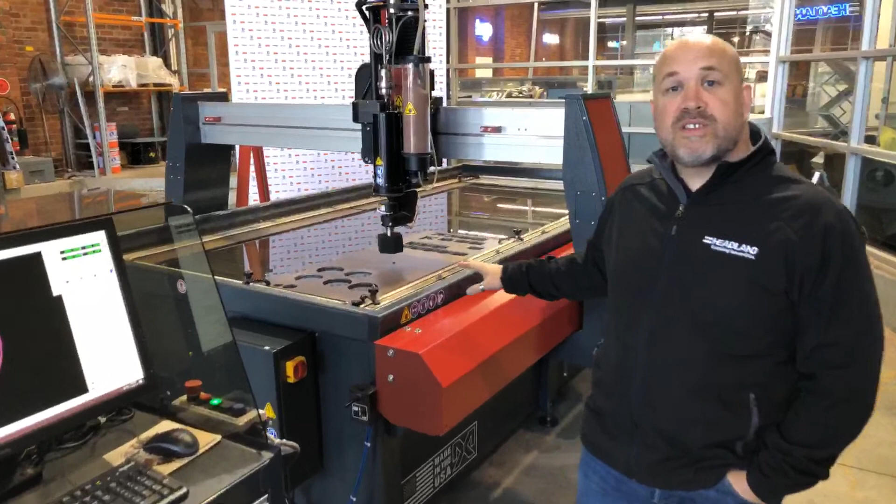Let's have a look at the machine. As I said before, this is the MAXIEM 1530 abrasive waterjet. 1530 means it's 1.5 meters in the y-axis and 3 meters in the x-axis. This one you see here has got some options on it, some additional extras.

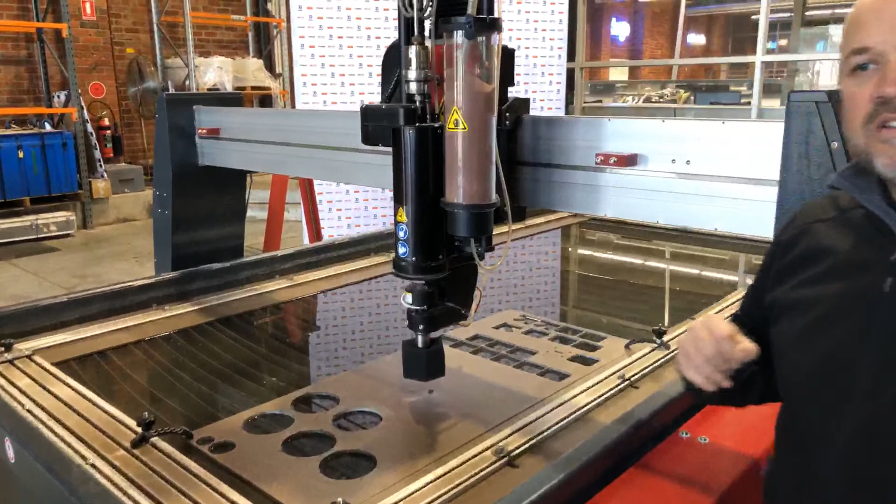We have the 5-axis cutting system. This allows you to do beveling, countersinks, well prep edges, that kind of thing. We also have at the back the rapid raise and lower tank. This is a fantastic feature for being able to raise the water in your bed quickly, submerge the cutting area, which means you get quieter and cleaner cutting. You'll see all this later when we actually do a cut.

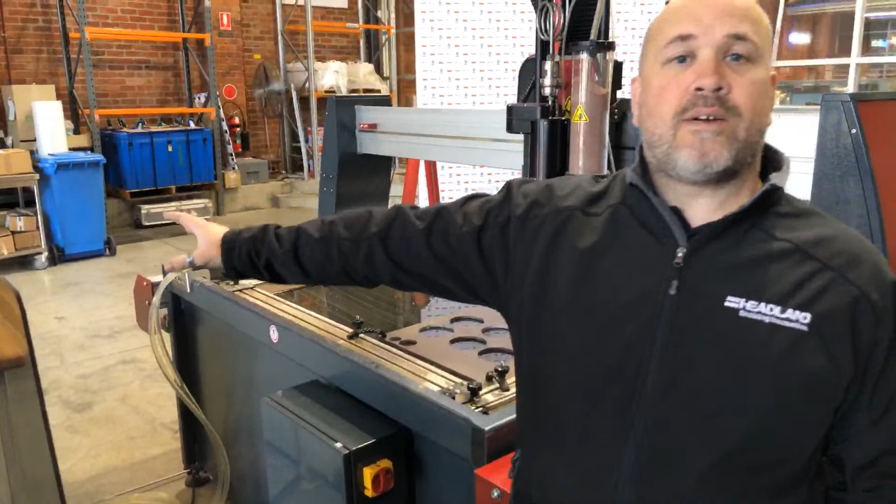In addition to that, we have the Enduramax pump on this one. This is Omax's premium pump. It has up to 800 hours of maintenance life between required seal changes and runs at 60,000 psi. Fantastic pump - it's the latest innovation in pump technology from Omax. We'll take you through that in a bit more detail in a minute.

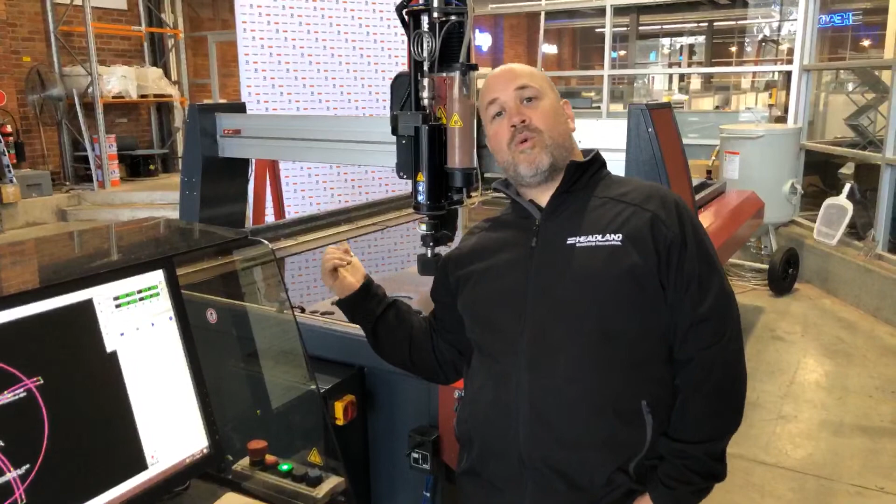Alright, so what we're going to do is we're going to take a quick walk around to the back of the machine where I've taken one of these covers off. You can actually see the drive system. So follow me.

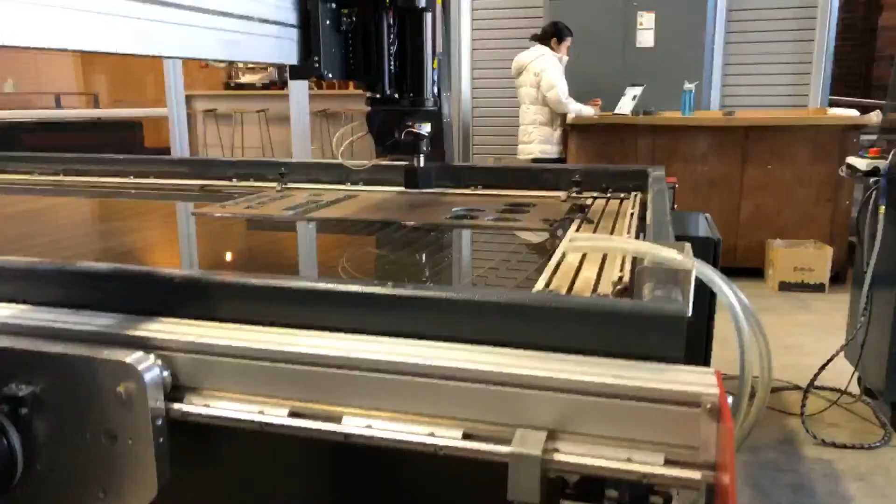Okay, so as you can see here, we have a drive rail on the x-axis. This here is a hard stop to stop the bridge from rolling off the end, obviously. We have a drive rail. Now, on this drive rail, there is a contact wheel on the underside, which is just tucked underneath there, we can't quite see it, and there's a pinch roller on the top. Now, what this allows the system to do is that when the drive isn't engaged, it just rolls up and down freely. It's very low forces, very free running, therefore doesn't require much power to run it.

Now, one of the great things about the IntelliMAX drive system is that it's the only drive system that's been specifically designed for abrasive jet cutting. What does that mean, you might ask? All the other drive systems out there - your rack and pinion, your belt drive, ball screws even to a degree - have wear components. If abrasive gets in there, it's going to cause you problems. This is an abrasive environment, so with all the best in the world, the abrasive's going to get in there. So it's going to wear these components down, it's going to cause problems in the future.

With the IntelliMAX drive system, you don't have any of that. It can run quite happily with abrasive on the track, it just simply pushes it out the way. The covers are in place to protect the drive rails from any reckless forklift drivers, shall we say, crashing into it, causing any issues. So it's there just to protect it from that kind of thing. It's not there to stop any water or abrasive getting on it. It will function perfectly well without it. It's purely there to protect it from collisions or anything like that.

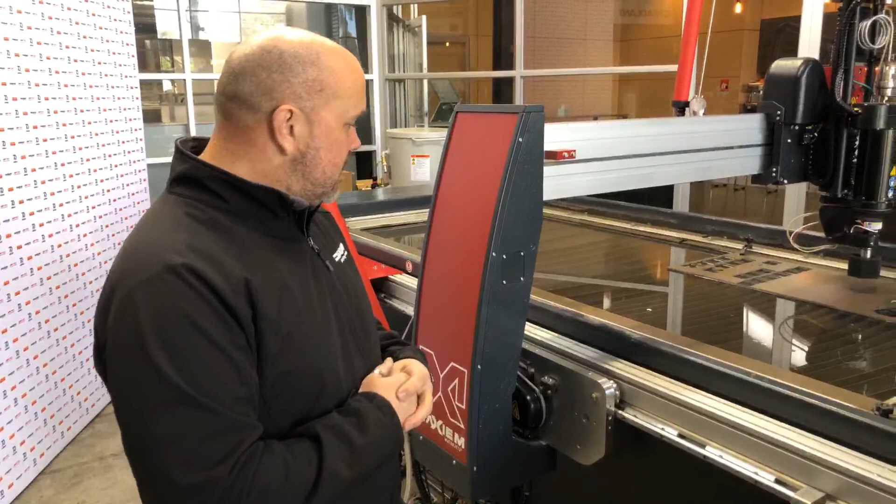Okay, so that's the IntelliMAX drive system. Incredibly efficient, incredibly accurate. It also has a 1 micron magnetic closed loop encoder system on it as well, so it knows where it is at any time. The fact that the front and the rear of the axis are both driven means that it is constantly monitoring, constantly adjusting itself to make sure that you get the accuracies you need from the parts you're trying to cut.

Alright, one of the other features I want to show you is this pump. As I said before, this is the Enduramax 40-60 pump - this one actually, not the 50, this is the 40. You can see, nice little wooden top, nice feature.

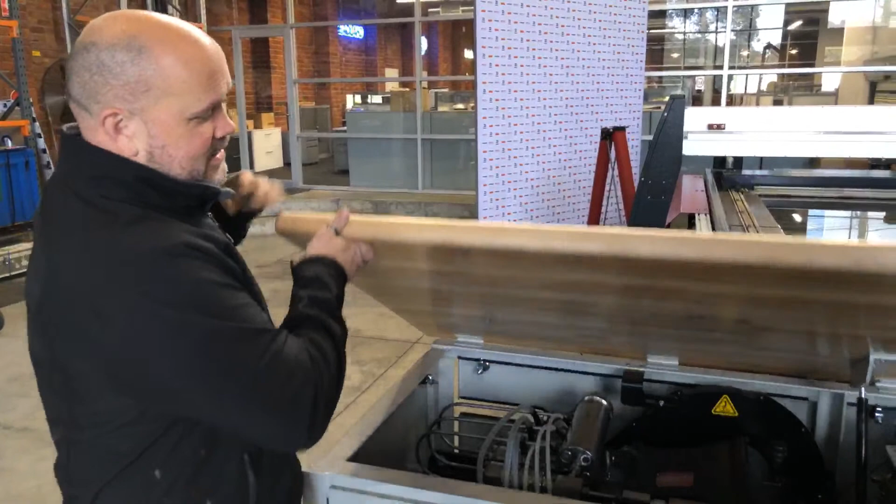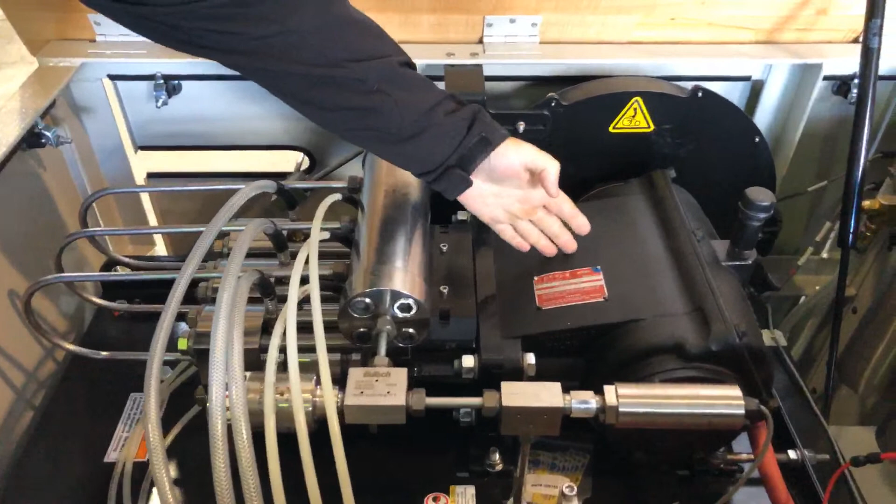Inside, you'll see it's a direct drive pump. So there's no hydraulics, no complicated electronics, nothing like that. It's simply just a crankcase running 3 plungers into the manifold, and that pushes the water out to the nozzle. So there's nothing complex about it, it's incredibly simple.

As long as that crankcase is turning and it's pushing water, you're generating pressure and you're cutting parts. This has up to 800 hours of seal life on it, so you can run 800 hours before you need to do any maintenance cycles. Very robust, very simple, like I said before. They just run and run and run.

Okay, let's go back round to the front of the machine.

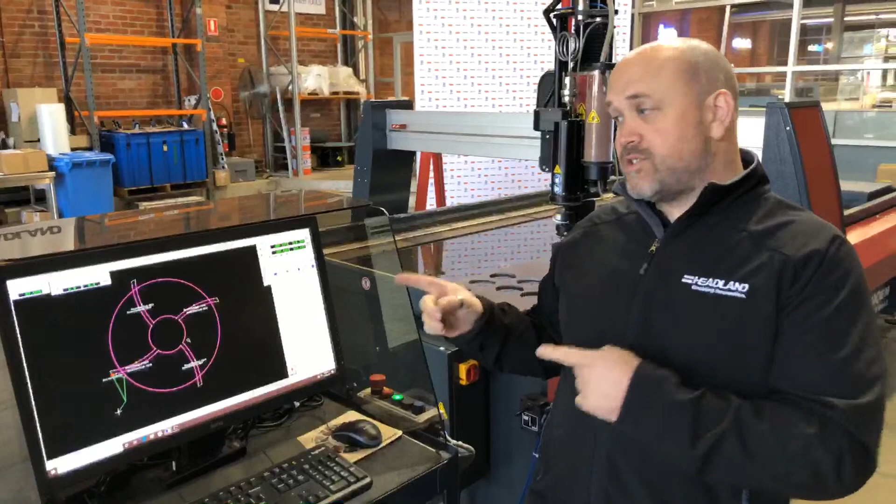One of the other real unique features about an Omax Abrasive Waterjet is the software. The Omax software suite is called IntelliMAX. It's made up of various different components, but the main two are layout and make. Layout is where you actually program your parts, and make, which is what's on the screen right now, is the part that actually controls the machine itself.

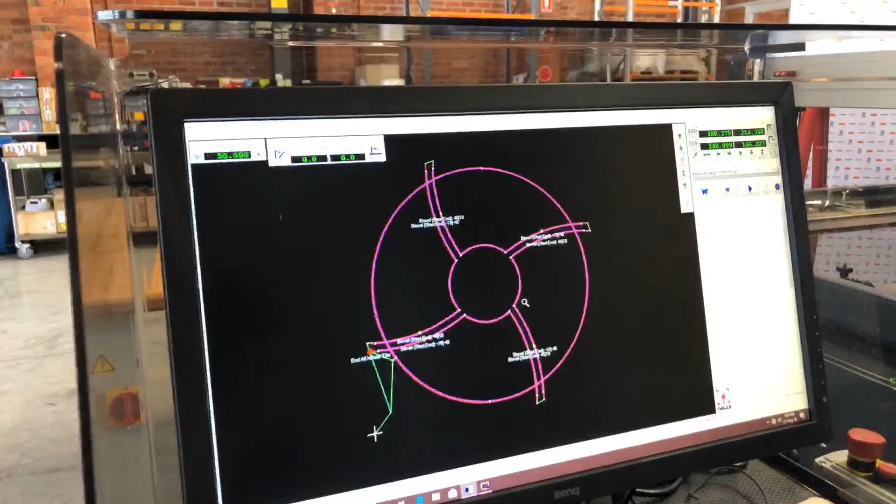So to help you understand how layout and make work together and how you can use them, I'm just going to show you briefly how it works. I'm going to program a quick part and then we're actually going to cut it.

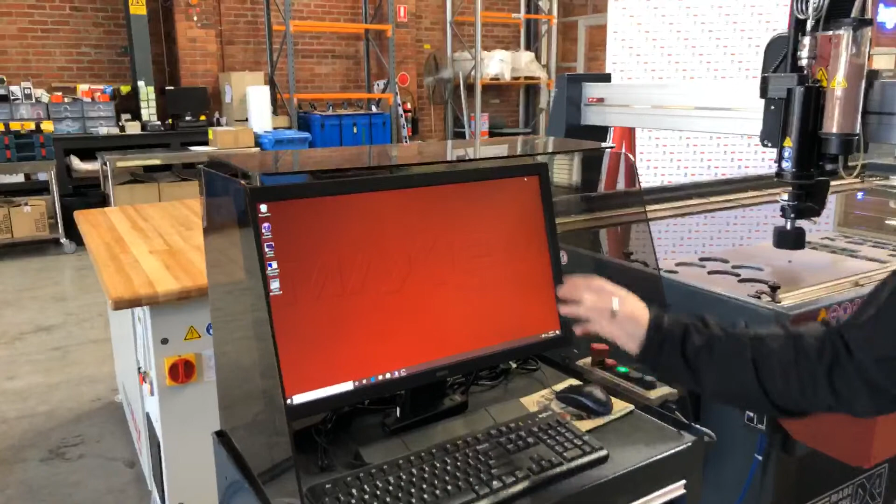As you can see here, this is just a Windows based piece of software. If I minimize the screen, you can see it's just Windows 10, and it's actually just a PC running this system. So there's no specialist controller, no specialist language you need to learn to run it. It's purely just a Windows based controller, Windows 10, and it's just a PC.

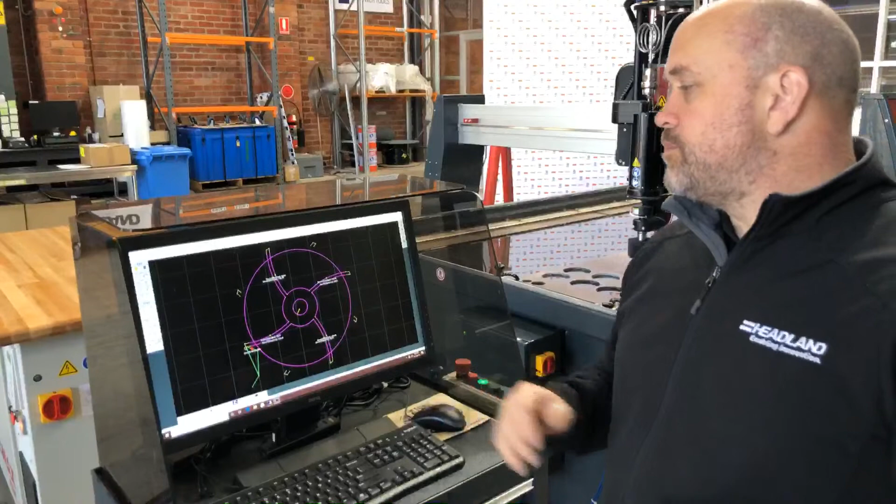So let's go back to layout. I'll call up a fresh page. As you can see, over on the left hand side here, you have your drawing functions, your editing functions, and some special features around the edges.

This means it operates as a standard CAD system, but you can also import pretty much any file type. You can bring in DXFs, DWGs, PDFs even, TIFF files, GIF files, bitmaps, anything. If it's an image file you're bringing in, you can use the trace function to generate your DXF from that, or you can just trace it yourself manually if you so desire.

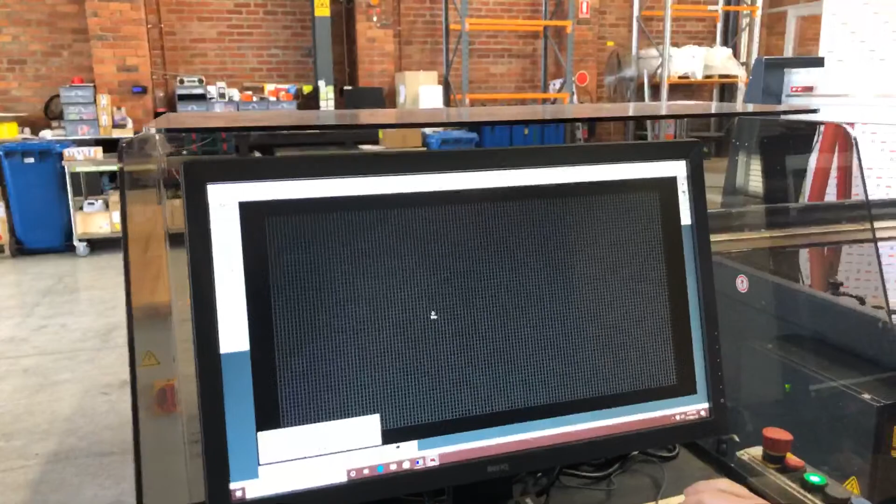I'm just going to draw up a simple pipe flange, for example, just to give you an idea of how quick and easy it is to use. So first thing I need to do is draw a circle, since it's a pipe flange. Let's make it 150 millimeter diameter.

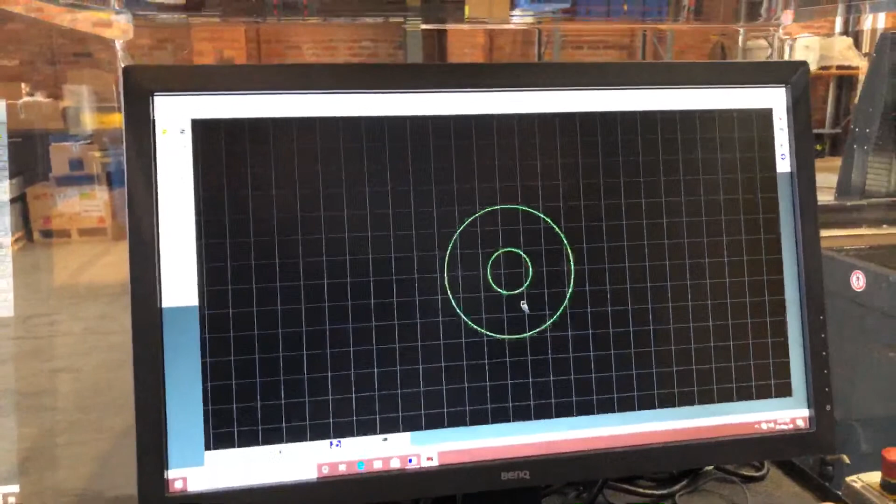Next thing I need to do is put a circle in the center. So, circle center, click on center, let's make that 50 mil. Now I'm going to need to put circles on a PCD, so again I need to put my PCD down. That's another circle, I'll put that at the center of the little one, at 125 mil.

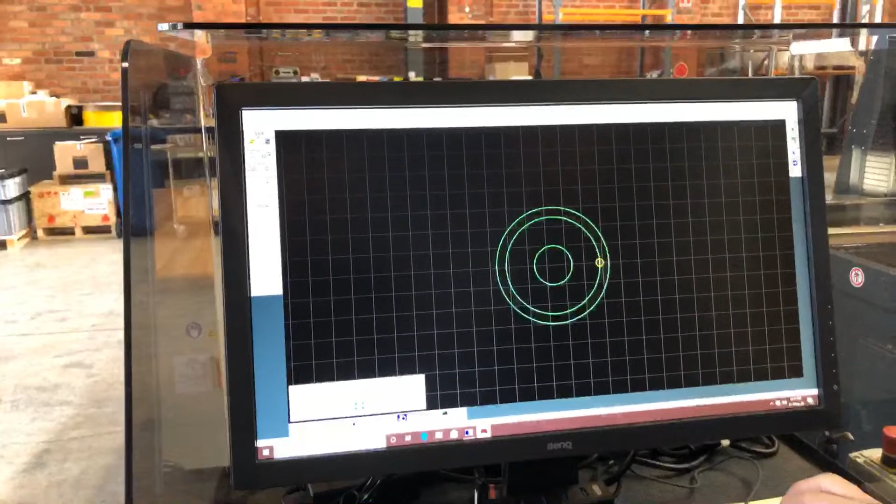Next are small holes, we'll make those 10 mil. Now I just need to select that hole there and rotate it around. So let's do 6 of them. There we go. Now I'm just going to get rid of the PCD line because we don't need that.

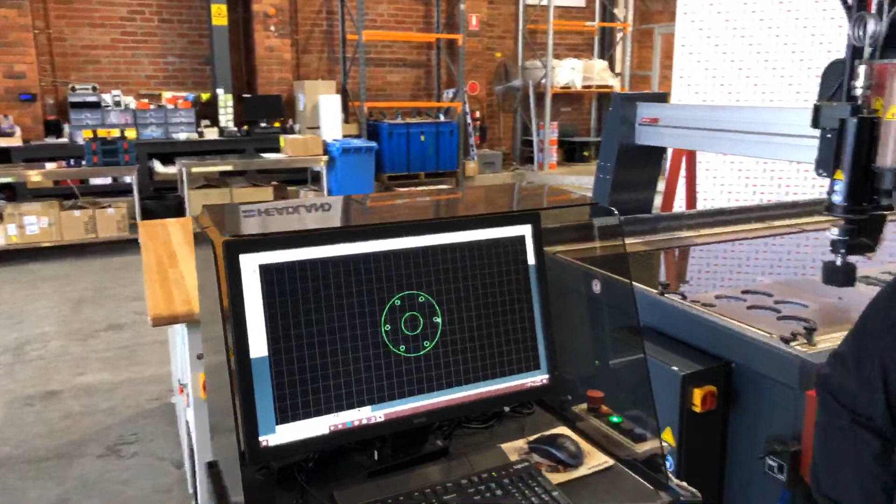So as you can see, there's your simple pipe flange. The next thing I need to do is assign what's called cut quality information. What the quality information determines is the surface finish your cut is going to leave behind. Quality 1 is the roughest but the fastest, quality 5 is the smoothest but the slowest.

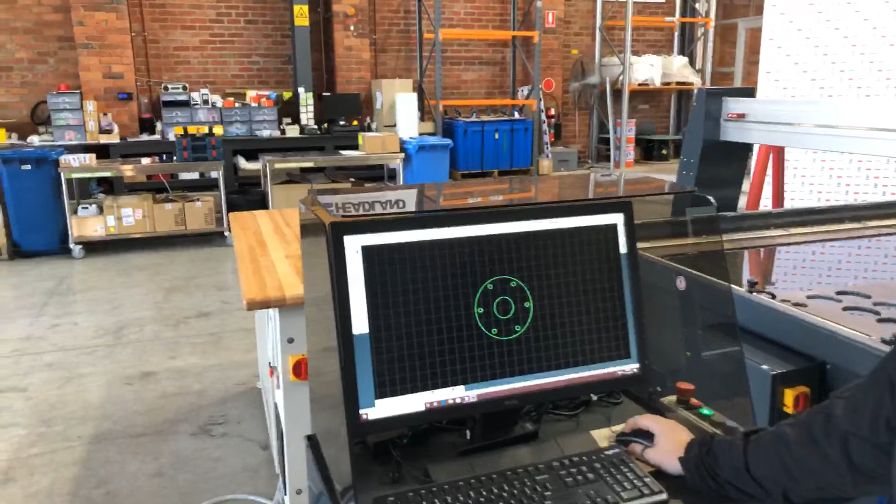So you'll find the majority of people will do most of their cutting with either quality 2 or quality 3. I'm going to do this one at quality 3, so that's nice and simple. If I click on there, you can see that all your qualities are different colours, which makes it really simple to quickly notice on your drawing what quality all the different features are at.

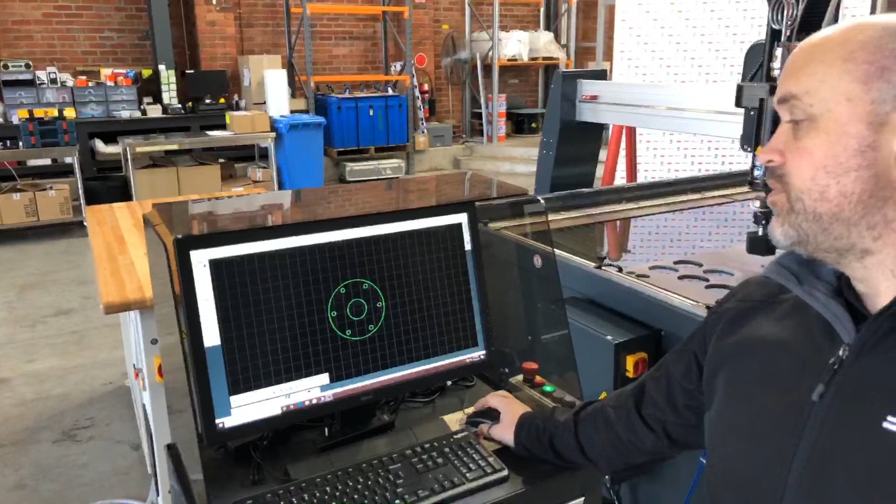The other thing as well is that not all the features need to be the same quality. If you want to vary the quality infinitely throughout the part, you can do that. You can have one edge at quality 1, have a hole you need to size at quality 5, and so on and so forth. I'm going to do it all at quality 3 for the purpose of what we're doing here, so we go quality all 3. That's now all selected at quality 3.

Just need to save it quickly.

I think somebody's at the door.

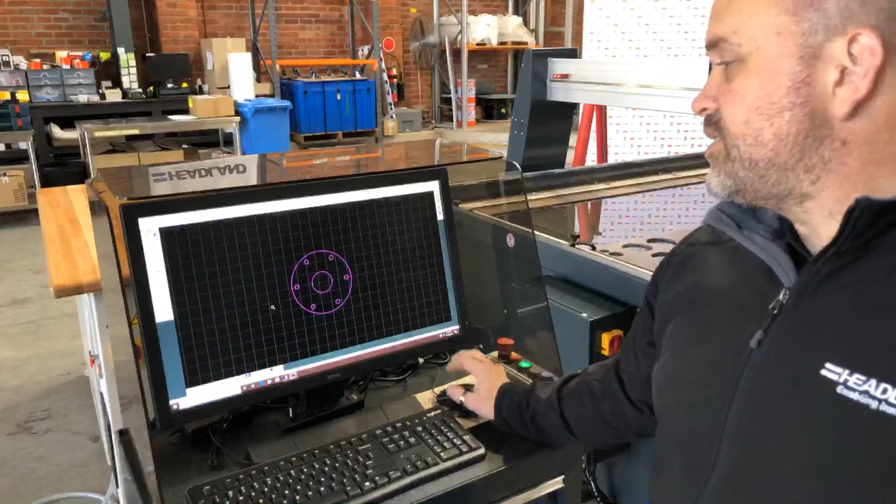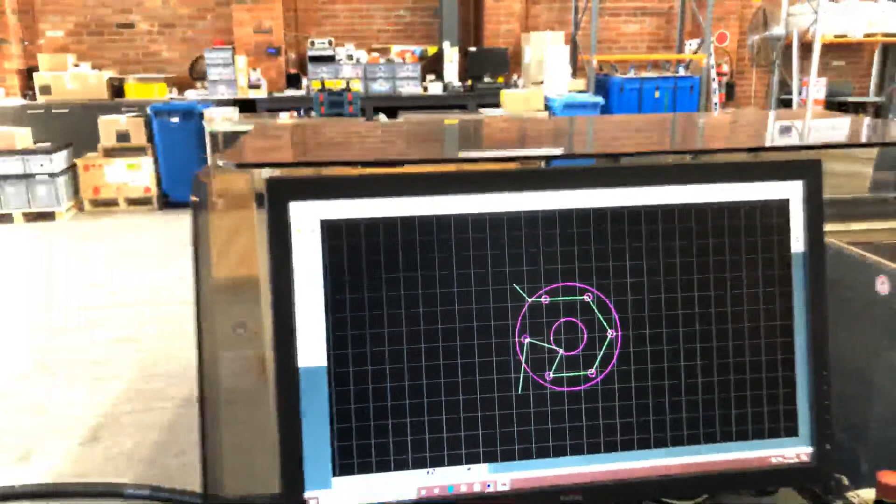Alright, so I've now saved that. I now need to actually make a toolpath. We have a button down the bottom here called Auto Path. I click Auto Path, and as you can see, the traverses and the lead in, lead outs are already done. It's automatically taking care of that for us. You can obviously configure that to suit your requirements, go top to bottom, left to right, whatever you want to do.

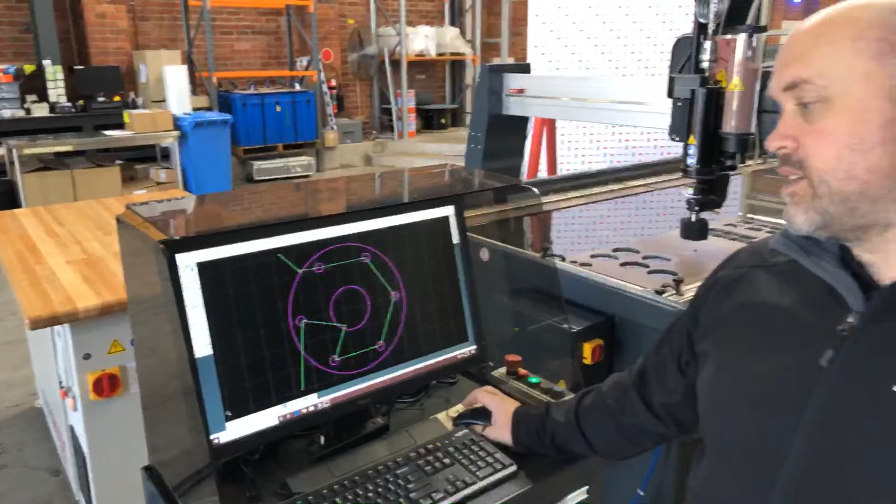Now we need to actually make our ORD file, which is the actual toolpath data file. Click Post, pick my start point. That has now generated the actual toolpath file itself, which is the file that Make is actually going to look at. Click Save. So you can see how quickly there I've gone from having absolutely nothing to having a toolpath.

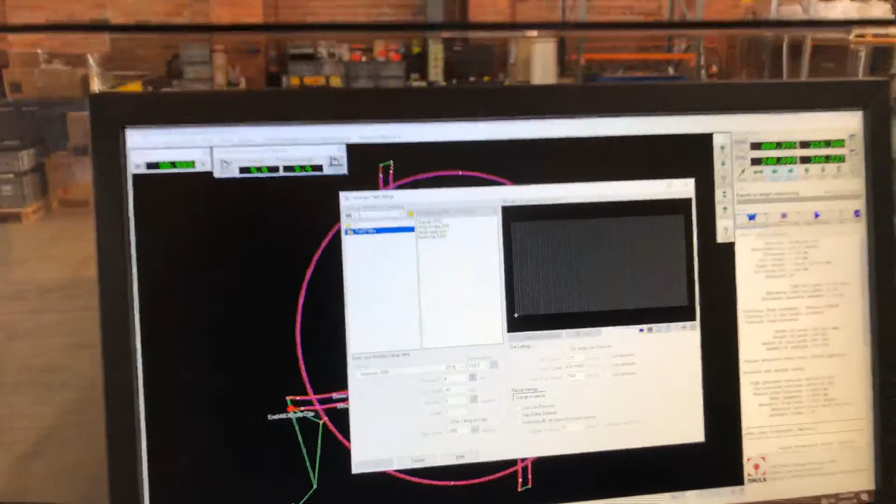So I can now jump over to Make, which is the software that controls the machine and actually does the cutting. I can load that part up. Once I can remember where I saved it. Nope. Just give me a second, everybody. Yep, there we go, I remember now.

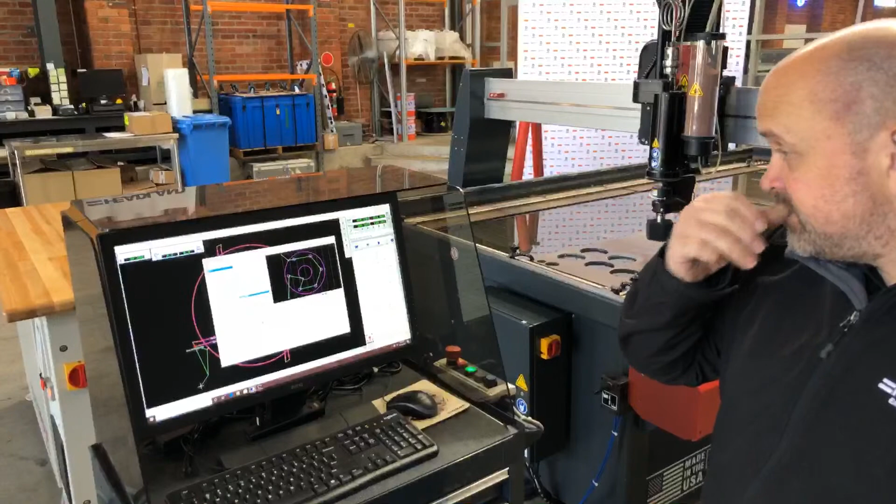Okay, so there it is. I can now set my material type and my material thickness, my tool offset, and I can turn the 5-axis system on and off if you have one fitted, obviously. So for the purpose of this one here, I'm going to turn the 5-axis system off. Click OK, that's now doing its working out.

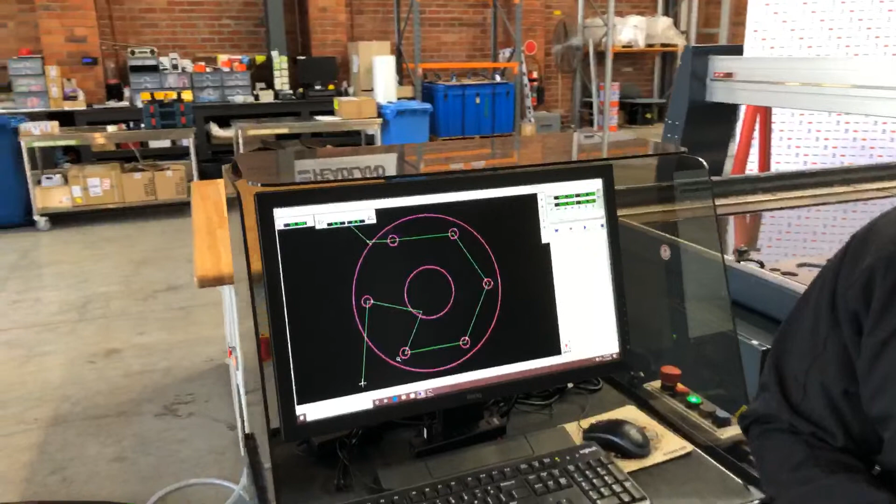So this is another unique feature about the Omax systems, what we call compute first, move later technology. This has already worked out exactly all the commands it's going to send to the drives, so it knows to the second how long it's going to take to cut this part. That timing quotation it gives you is to the second, and I challenge anybody to bring me their part, time it, and you'll see I'm right.

So now what I'm going to do is show you how to move the head around. We're going to position the nozzle in a good place to cut this part, and we're actually going to cut it. To move the head around, it's nice and simple, I just use the arrows on the keyboard here, or I can use the buttons on the screen. Doesn't really matter, just give me a sec.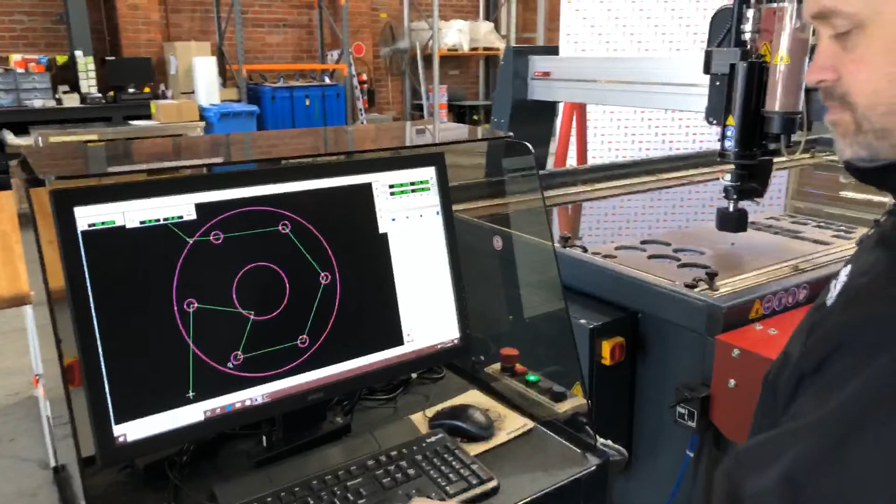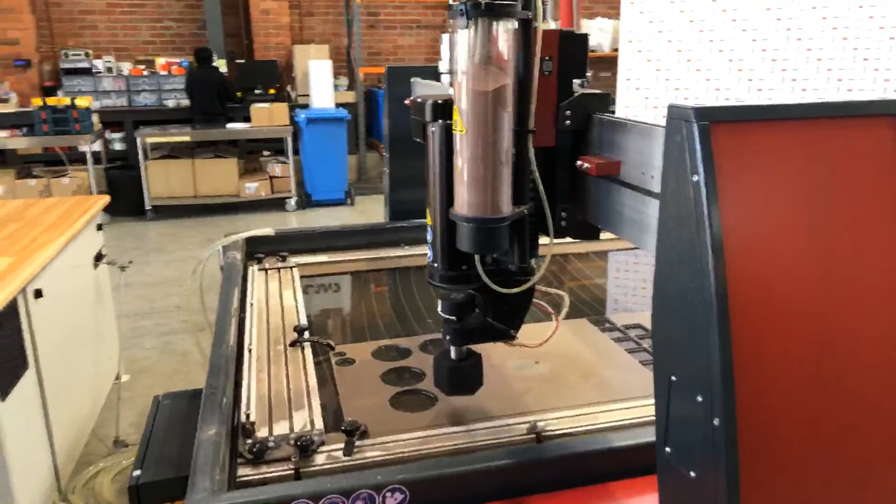Okay, so I think that's in a good position to start cutting. I'm just going to bring the head down. So that's now in the start position. You'll notice that the material's still out of the water, and I spoke before about making sure that you submerge your part to cut, because it makes it cleaner and quieter.

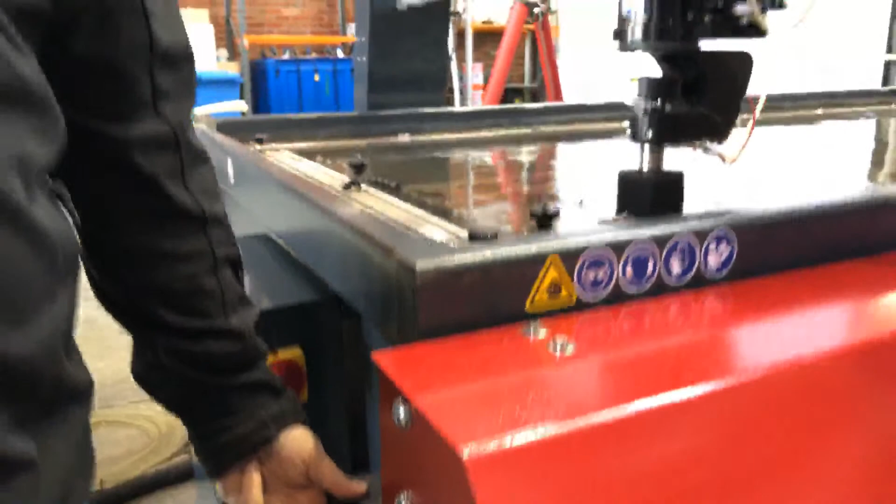So by using this little lever here, as you can see, it brings the level of the water up to the point where the part and the nozzle tip are submerged. It makes it a lot quieter and a lot cleaner. Okay, so I'm just going to go flick the pump on, and then we'll cut it.

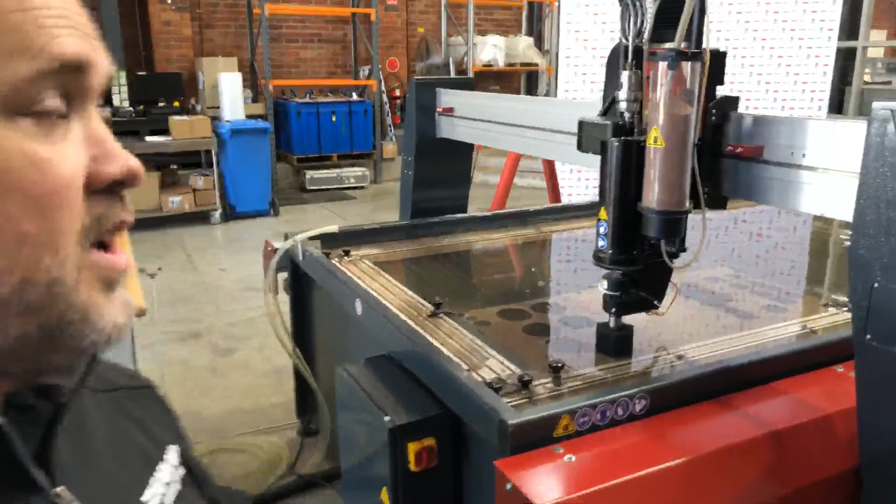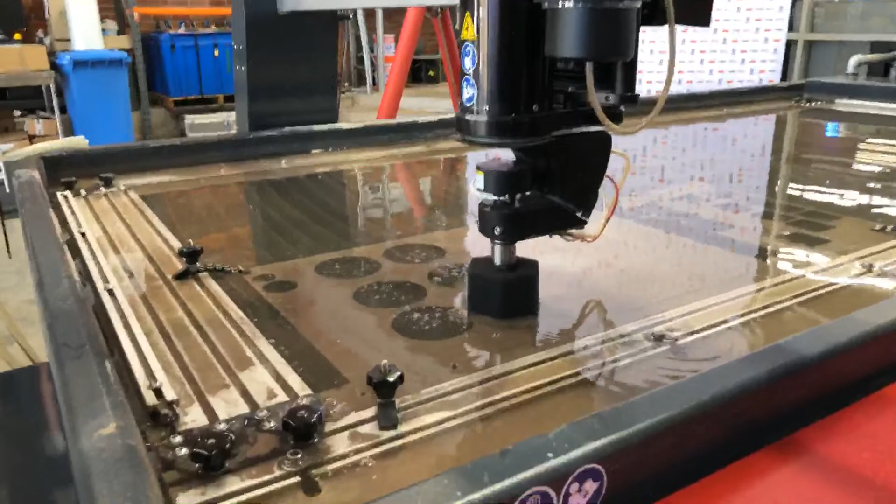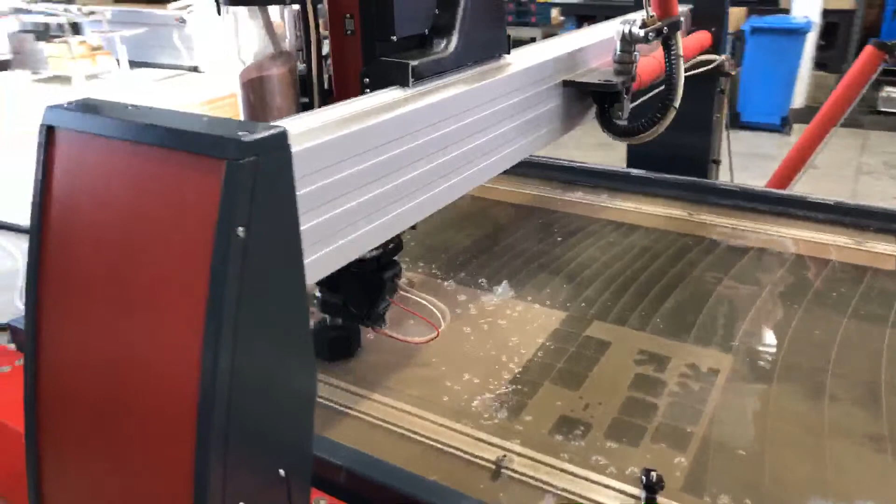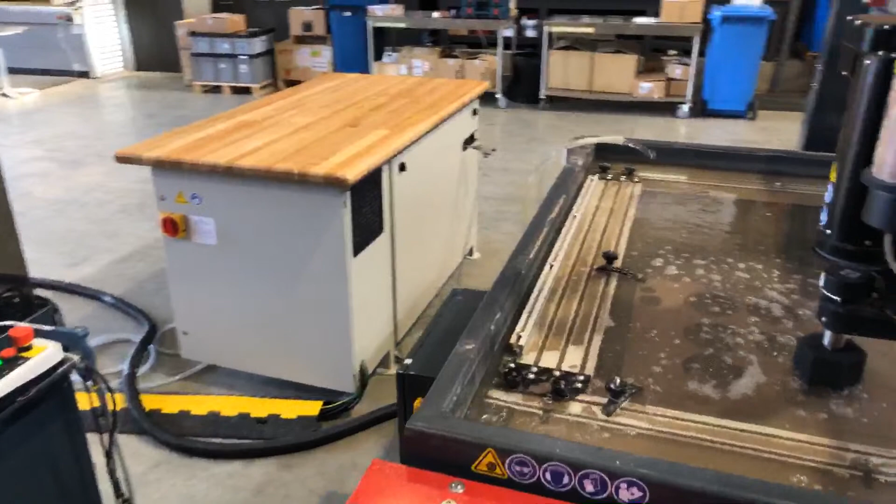Okay, here we go. Okay, you ready?

It's a lot louder when you don't have that nozzle submerged, which is why I think that's a really good feature.

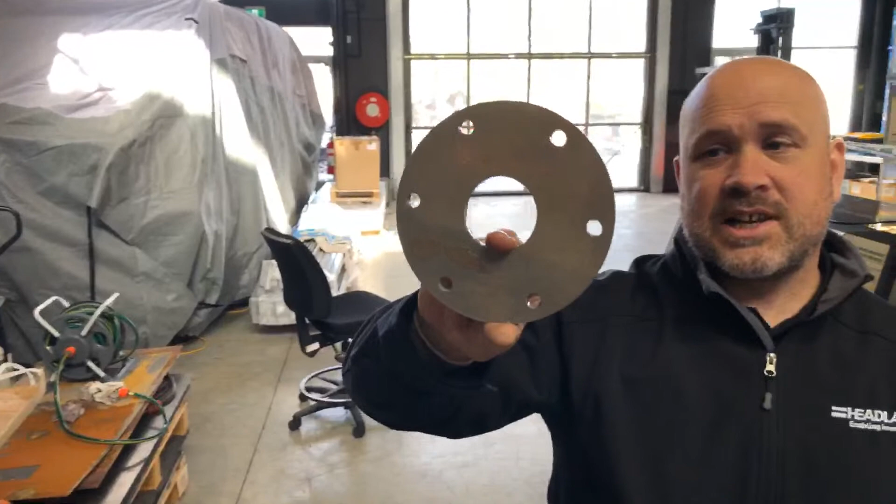Okay, so there you go, it's done. I can reach straight in, pick it up. Completely cold. There's your finished part. As you can see, it's exactly what I drew. And that took 2 minutes to complete.

Alright, so from going from having nothing, you could essentially, if I wasn't waffling on to you guys, I could essentially draw this and have this cut in under 5 minutes. Going from absolutely nothing to having a finished part in 5 minutes. You know, you go away, have a cup of coffee, come back and it's done.

One of the things I want to show you, other unique features about this software, and this is one of the things that I really like about Omax, is the fact that all the software upgrades are free for life.

So there's a really good sample that we take to trade shows with us. We show 3 gears, one really small gear, one medium size, one large. And the only difference between those gears is the software that was used to cut them. They all took the same amount of time to cut. They're 1 inch thick stainless steel gears.

And the only thing that changed was the software upgrade. So customers that bought a machine that cut that small gear now have a machine that cuts that big gear in the same amount of time, and that's purely by free upgrades. That's available to every single Omax customer. Okay, so really good feature.

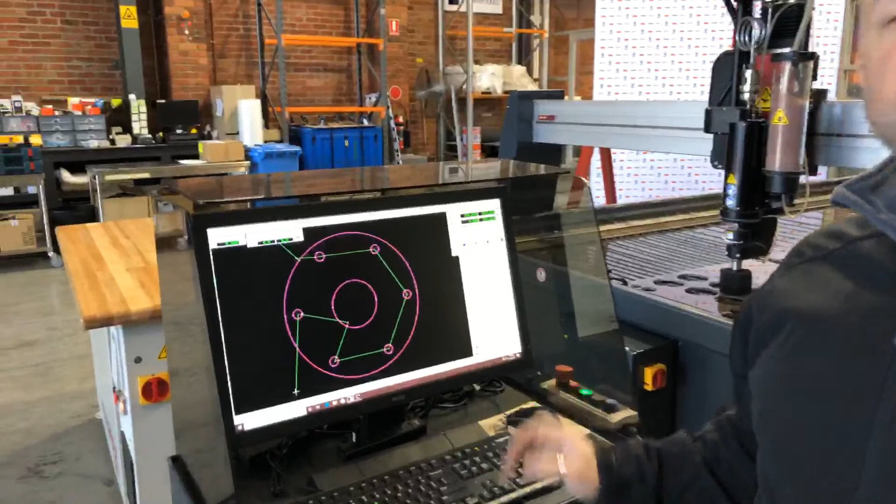Alright, so now obviously, we're talking about the 5-axis head before. So what I'm going to do now is I'm just going to load up a 5-axis program, and we're actually going to cut something with the 5-axis head, just so you can kind of get an idea of how it moves around and what it does. So same process again.

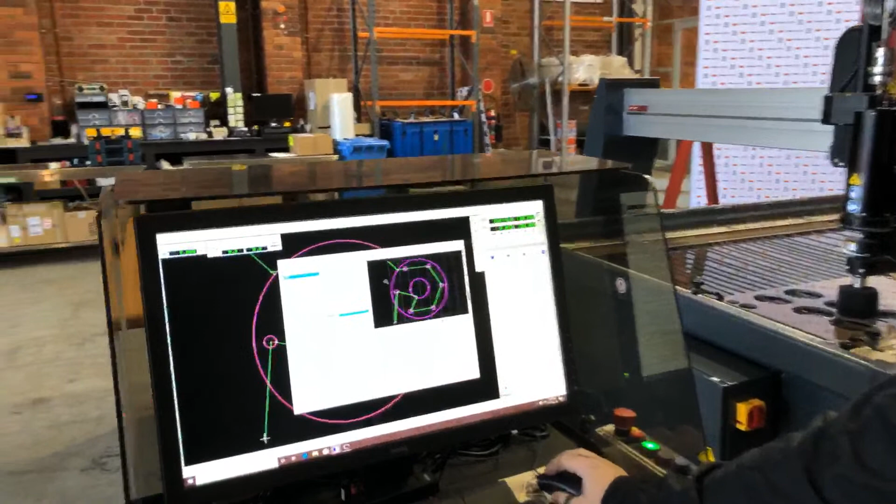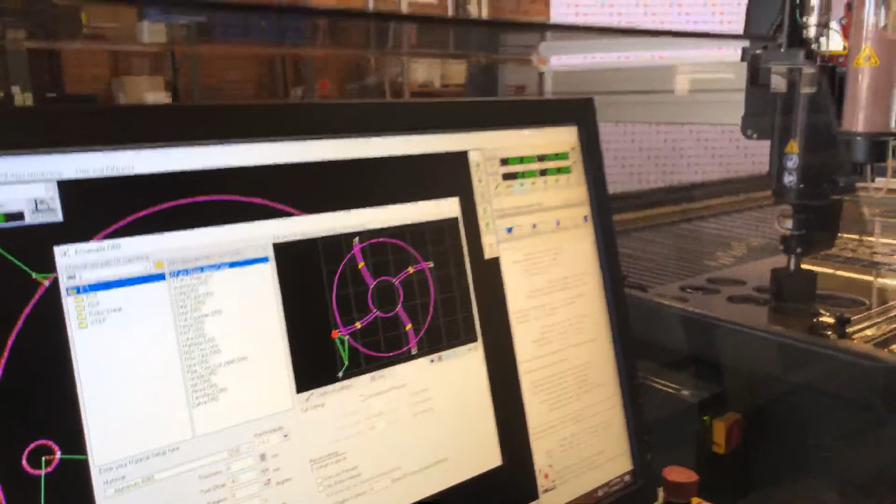Again, I can pick my material. As you can see, we have lots of different materials available to us here: plastics, stones, woods, foams, rubbers, all kinds of metals and glass and composites, even ceramics. There's lots and lots to choose from. The piece I've got on is 8mm thick aluminium, so we'll leave that as it is.

What I do need to do now is turn on my 5-axis system, so that's now done. Click OK. So that's loading up all the movements it needs to do for the 5-axis as well. I'm just going to traverse the head over again to a good position to start the cut.

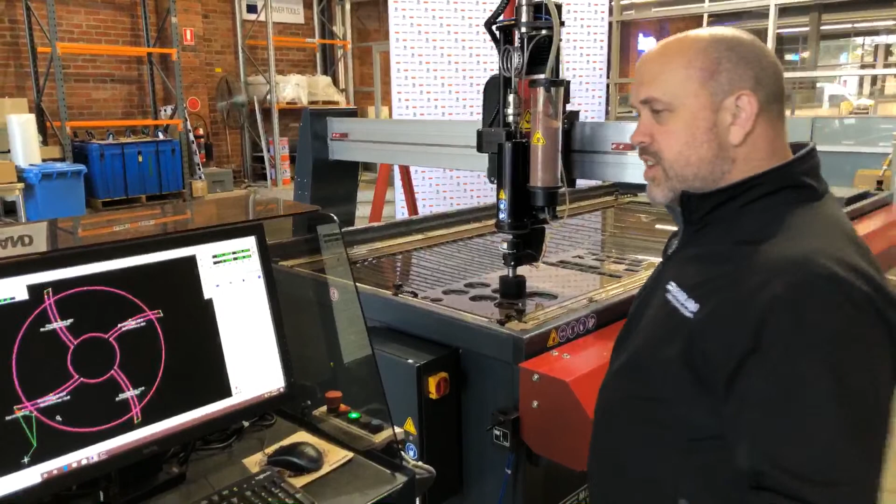And I think there looks like a good place. I'm going to bring the water level up again, because again, it keeps it nice and quiet.

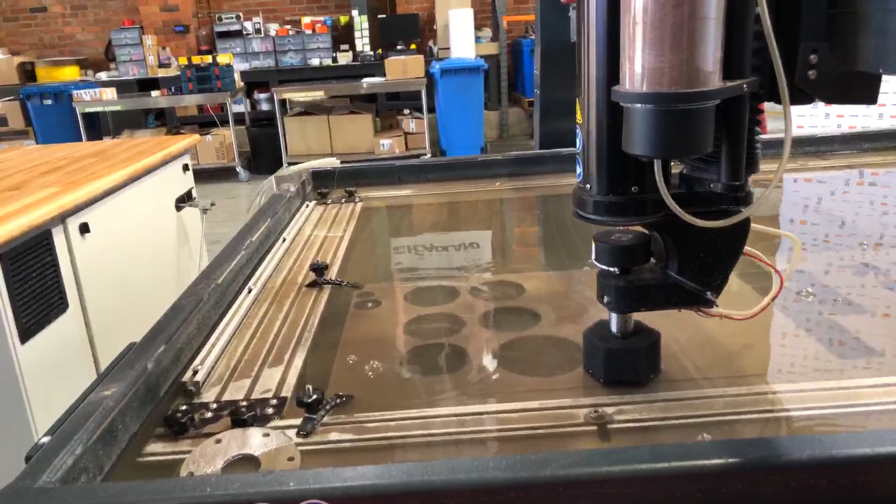Okay, here we go, 5-axis cutting.

We've got a little technical issue there. I think our gimbal's just died on us, so just bear with us a second. Yeah, I think we're back on. Excellent. Alright, let's start the 5-axis cutting.

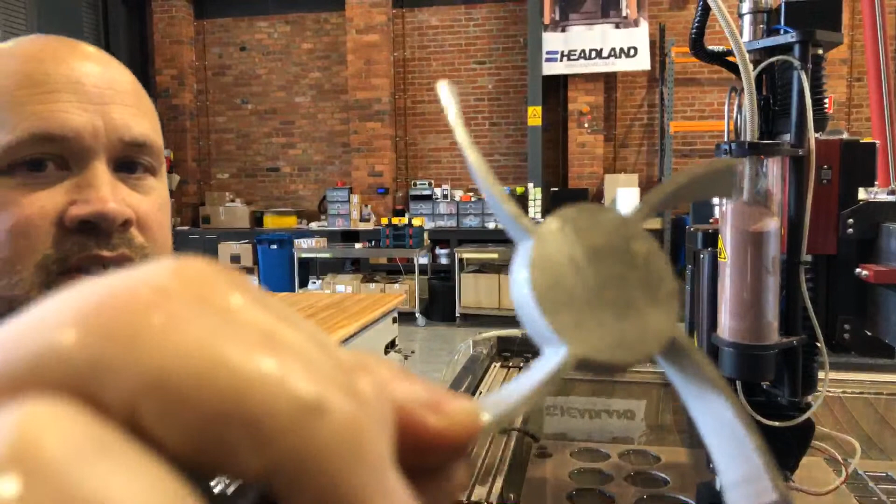Okay, let's reach straight in and pick the part out. And there you can see what I was cutting, the fan blades on that. Okay, pretty good. Nice and simple to do, quick to program, easy to cut out.

Okay, so that's working with the A-Jet, that's the 5-axis part. So what I'm going to do now is answer a few questions that I've had come up at trade shows. These are the common questions we get asked all the time.

The most common one I get asked is regards to cutting pressure. Other manufacturers will offer you machines that will cut 87,000 psi, 90,000 psi, all these fantastic, lovely big numbers. But what does it actually mean? People come to me and say, Matt, what's the best one? Do I go for 60,000? Do I go for 90,000? What's going to give me the best results?

The answer is reasonably simple. Pressure is not what determines how fast your waterjet will cut. What determines how fast your waterjet will cut is something called hydraulic horsepower at the nozzle. Essentially, how much water can you move through that nozzle within a given time. The more water you can move, the more abrasive you can move. And as this is an abrasive waterjet, it's the abrasive that's doing the work and doing the cutting, so the more abrasive you can move, the faster you're going to cut. So it's not about pressure.

To generate those high pressure numbers, you have to restrict the flow of water. By restricting the flow of water, you're reducing your hydraulic horsepower. Therefore, you're actually reducing your cutting power, and you're going to be going slower. It's as simple as that. So you see these lovely big numbers, they look fantastic, but they actually mean nothing. All it means is you're going to be cutting slower.